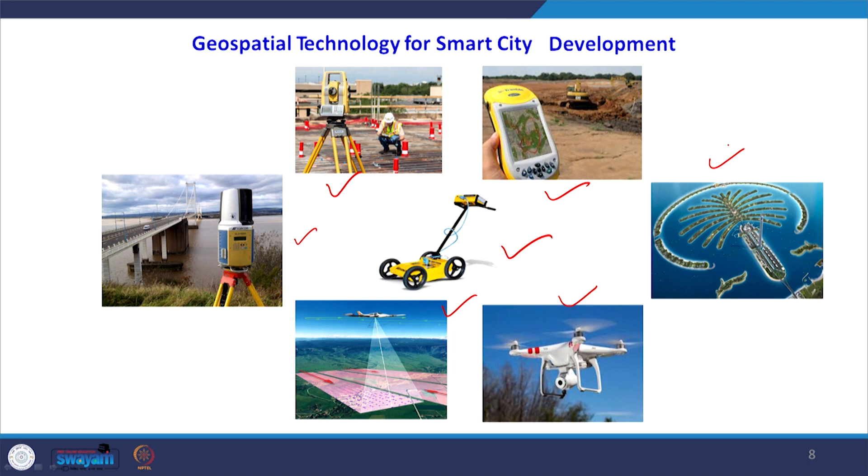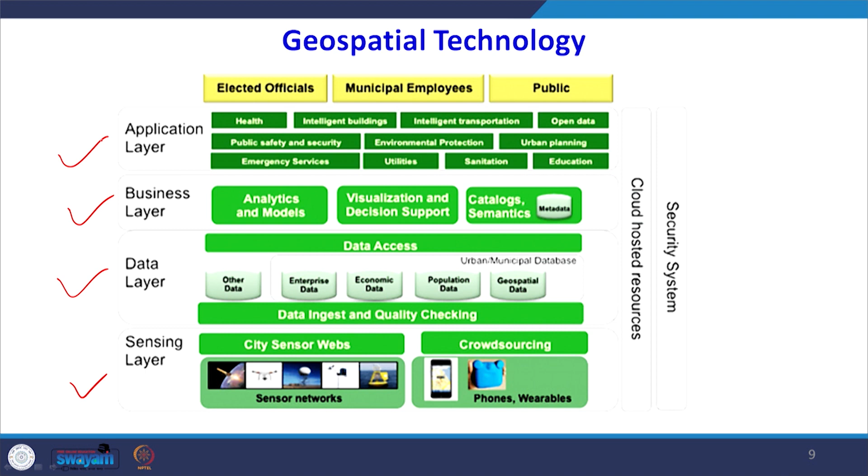Finally there is the application layer. We apply the input derived from this data for health applications, intelligent building applications, utility, sanitation, urban planning, and the education sector. This is the application layer, where the data comes from the first layer.

There are potential uses of geomatics in smart city planning, whether it is urban planning as a whole, land use planning and management, or developing emergency response systems using the capabilities of remote sensing, GIS, and GPS data. Health facilities planning, where we want to develop new health facilities in a particular area, is like a location allocation modeling problem.

Parking area planning is a real problem in all major cities, as there is no parking space, particularly at tourist locations. So parking area planning, where the driver is communicated well in advance whether parking space is available or not, is important. New infrastructure planning is another area, and tourism planning too, because in many areas revenue could be generated from tourism only, like in Uttarakhand where we have Char Dham, where tourism activity is growing very fast, and better tourism planning can be carried out with the help of these geomatics tools.

Then online property tax management. This is billing, collection, online collection of utilities, phone bills, etc., and grievance redressal. This is also a very important part. You can provide feedback, and you can upload your grievances which could be attended to electronically. So this is all the potential applications.

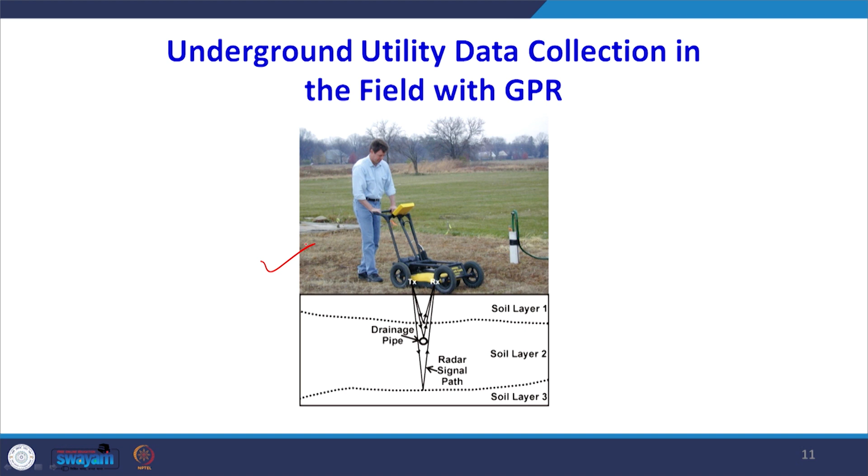Now if we look at some of the tools and devices we are using for collecting data, this is a ground penetrating radar device, and the data is collected below the ground, because all the utilities in the smart city have to be buried under the ground. Whether it's a telephone line, electric line, power line, cable, or gas line, these all have to be buried under the ground, and there should be proper mapping. That you can carry out with the help of this device, called the ground penetrating radar device, so that wear and tear is minimum, and you spend less money on maintenance work.

When the facilities are above ground, you can have broken poles, and due to strong wind, sometimes you have a cut off in electricity because the poles are broken. That kind of problem will not be there when we have underground utilities.

Now if you are talking about intelligent transportation systems in a smart city, the geomatics tools will provide a lot of information to us, giving improved safety, fewer accidents, improved traffic efficiency, and reduced traffic congestion, because this is a big issue in major cities of the country, and as a matter of fact, worldwide. So we can reduce traffic congestion if we have advanced information with us.

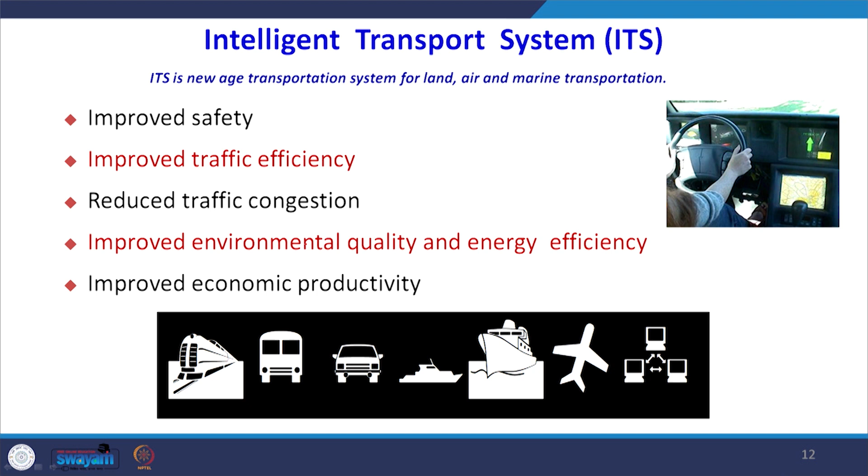We can improve environmental quality and energy efficiency, because a lot of emissions are produced by vehicles moving on the road. And we can have improved economic productivity with the help of the latest devices and by developing intelligent transportation systems.

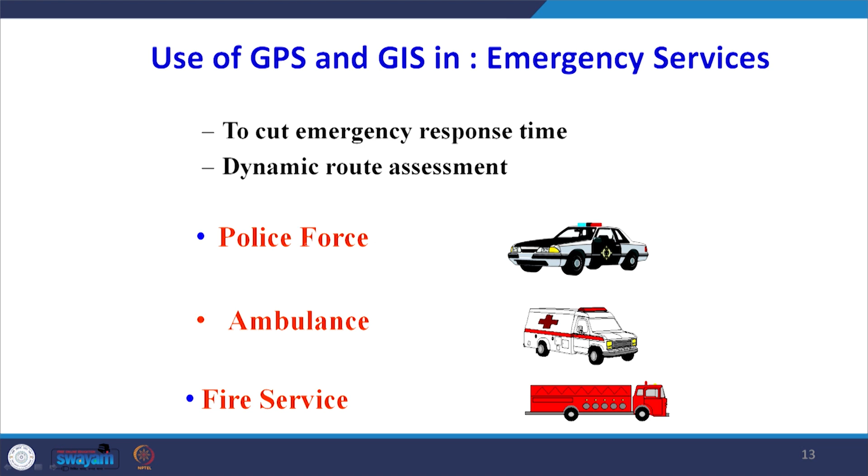These GPS and GIS, and also high resolution images, will be used in emergency services. So emergency services in smart city areas like police, ambulance, and fire services will be equipped with all the modern geomatics tools, so that you can avail emergency services in case required.

So everything in that car will be governed by the sensor systems, and the person who is driving or operating the vehicle will be informed by these sensors. The information will go to the device, and accordingly action could be taken.

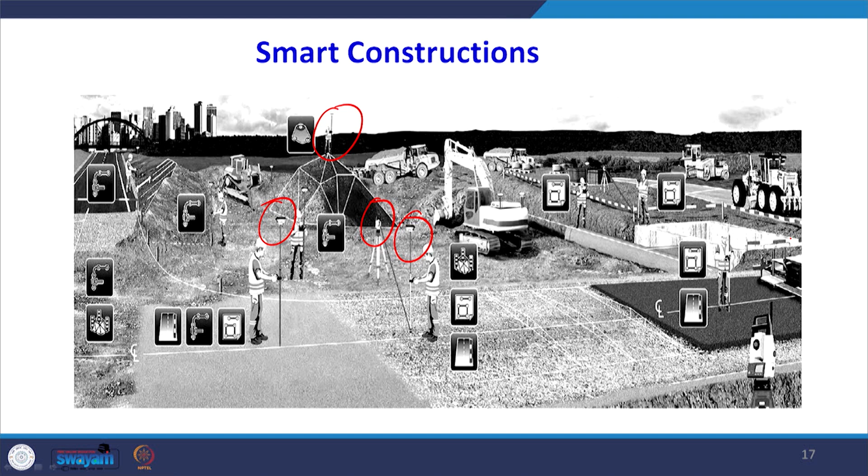Whenever you have a 3D model of the structure, these devices also work on the basis of coordinate systems and point cloud data, so there is one-to-one coordination between the actual drawing and the data collected at the site. That is why this is called smart construction. These geomatics tools help us make construction very precise.

Mobile 3D mapping systems, which you have seen earlier, can collect data for a larger area. When planning a new urban area or setup, data has to be collected very fast in a 3D environment, so you require a system that can be mounted on a vehicle to collect data about that area. Then we also require satellite images.

So one can carry out trend analysis and pattern analysis, and also study what kind of infrastructure would be required to support the growing population in that particular region. Urban growth can be determined using sequential satellite images.

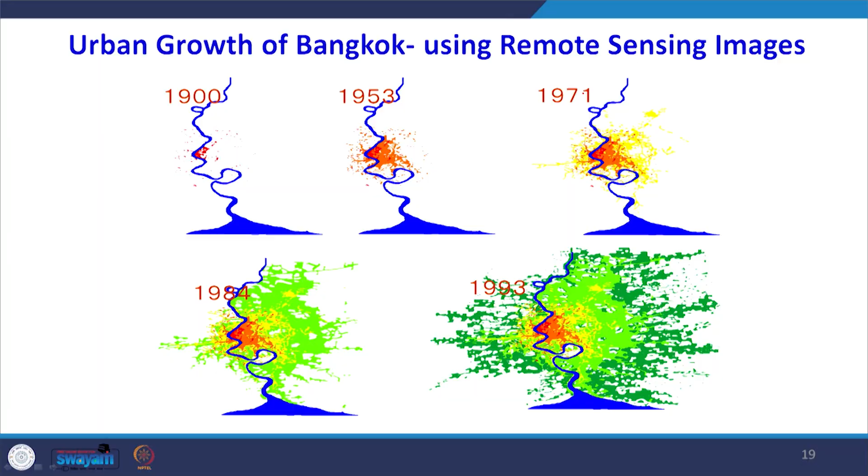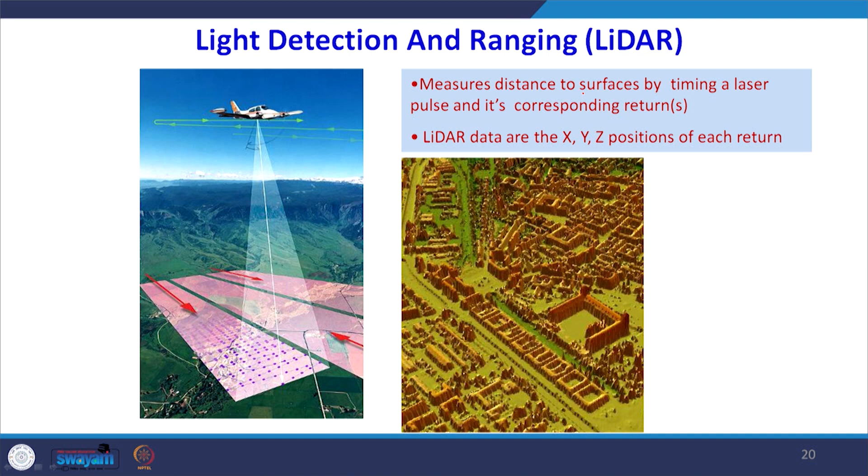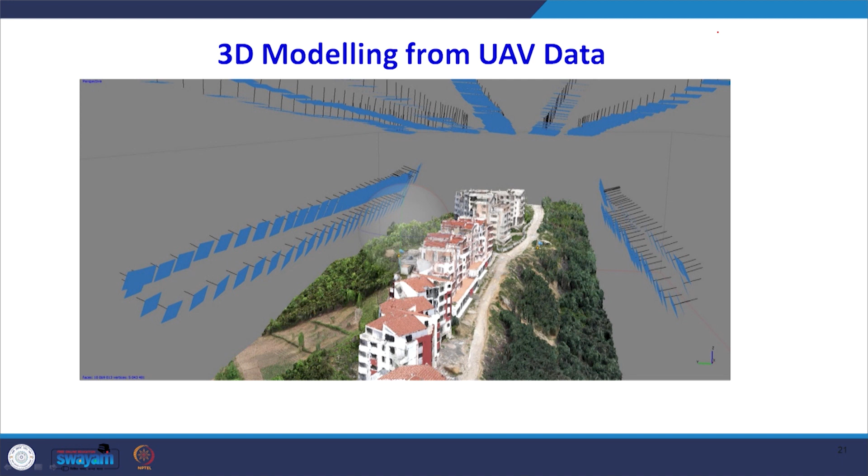We now have very high resolution satellite images where we can find each and every building. If we want the three-dimensional coordinates of a building, such as its height, we cannot get that directly from the satellite image, but we have LiDAR technology available, which gives us the height of individual buildings. UAV is another technology where you collect data from a lower altitude using a drone, creating a 3D model of the entire area or infrastructure. These kinds of images are very helpful for carrying out precise planning in the area.

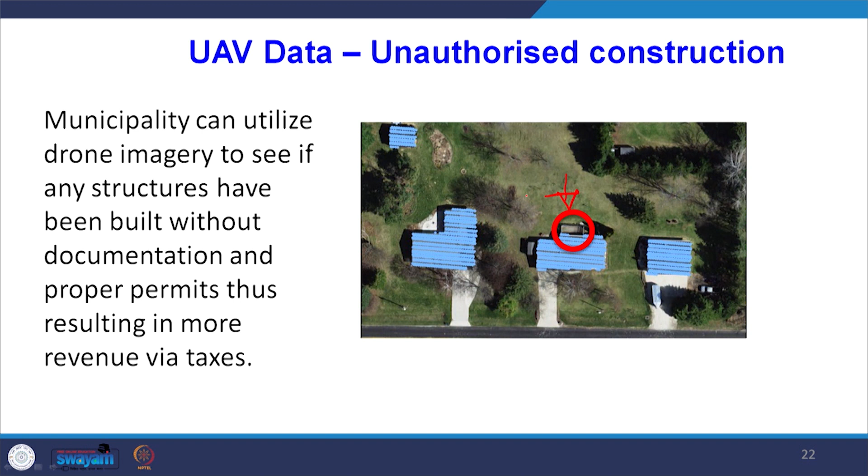Unauthorized construction can also be located if you have sequential images at very high resolution. For example, the circle here shows unauthorized construction. This is a major problem in big cities, where there is construction not approved by the local authority, and we can determine that using this technology.

When we are doing construction, drones can help us a lot. In the modern construction industry, drones are used to monitor construction activity. Here we see one drone, another drone, a third one, and a fourth one, all operating in the area at different heights, used either for building inspection work, for delivering materials to the client and staff, for monitoring on-site activity, or for security applications, which is also a major issue nowadays.

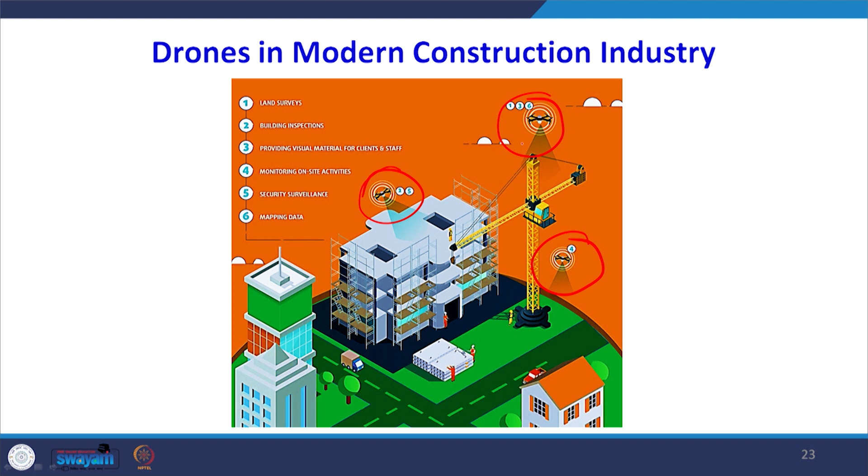These drones are continuously stationed at a particular height, collecting data and providing it to the engineer, who may not be at the site physically but is sitting somewhere else, still watching the construction remotely. This shows how the construction sites of the future are expected to be.

We have a building information model, and the infrastructure is connected. Here one can see several sensors and drones shown in this slide, along with certain devices that are connected to each other.

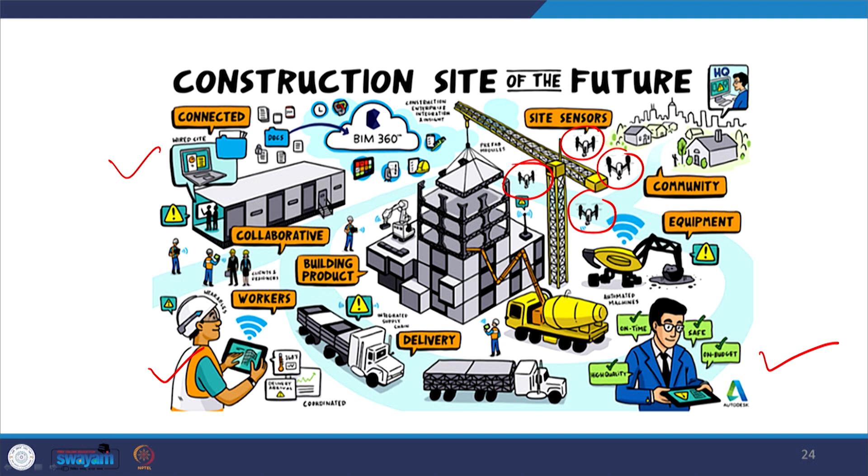There are sensor based equipment, and there are geomatics tools which are providing us the data. Everything is communicated, and whether it is the manager, supervisor or engineers, they are supervising the whole thing through their system. You can see they are all digitally connected, so every information actually comes to their system, and from there itself they can monitor the quality of the construction, or give instructions.

Drones are also useful in several other activities of a smart city, whether we want to inspect our infrastructure, maybe a railway line or a road. Roads develop a lot of potholes, so repair of potholes can be carried out, or if the railway track requires maintenance and repair work, that can be carried out with the help of low flying drones in the area, or for delivery of goods.

This is also very successfully being used in many countries, where drones are delivering goods to people in urban areas. Then there is traffic monitoring, to check whether traffic is moving smoothly or somebody is breaking the traffic rules and regulations. Then environmental monitoring, because there is a lot of environmental pollution in the area, so what is the pollution level? There are environmental sensors fitted on the UAV for that.

There is one new area which is the taxi UAV. These UAVs are expected to fly up in the sky at a certain height, a lower height, and can move much faster than road vehicles, because there is a lot of traffic on the road. Taxis or vehicles cannot move at high speed due to traffic lights and congestion on the road, so these can take you faster from one place to another.

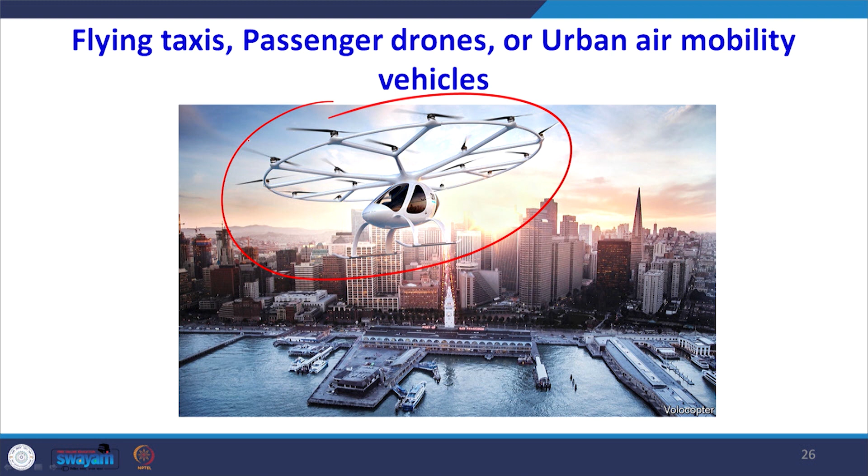So how these flying taxis, or what we call passenger drones or urban air mobility vehicles, work is shown here. This is a flying taxi which will fly at a certain height above the ground and move much faster, taking you from one place to another. If we look at the details, they are just like a helicopter, they will take off and land vertically, so from the rooftop itself you can control the entire thing.

This is a four-seater, for example. It can fly at 600 meter height, and can travel 30 to 160 kilometers at a speed of 100 to 270 kilometers per hour. These are expected to come in the market very soon, and once available, we will have less traffic congestion on the roads because people can use these facilities.

When we talk of the smart city framework for India, there is physical infrastructure planning required, covering energy, water, waste, mobility and real estate. Then there is social infrastructure planning, covering health, education, safety of the people, culture, and citizen services. The third aspect is environmental planning, covering climate change, less pollution, disaster management and city specific environmental planning.

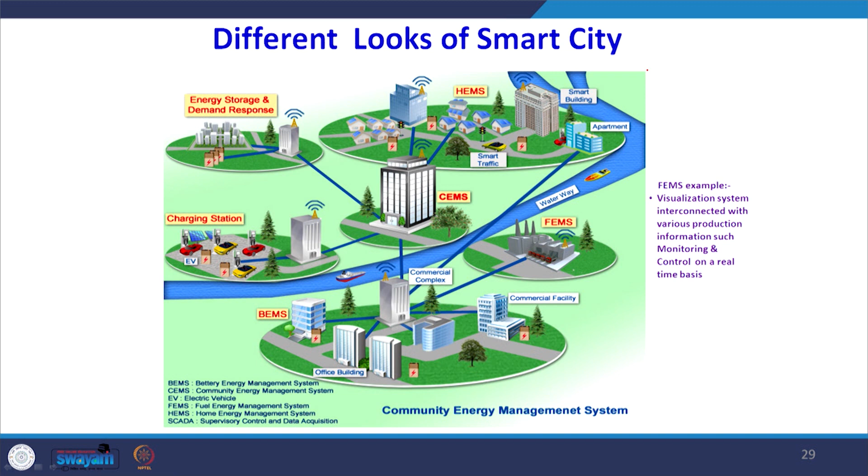The last part is governance, which relates to the development and operation of policies, and communicating with citizens. When we carry out planning using these modern devices and gadgets, we can have a lot of savings of energy. We can manage our energy very well, because it will not just be grid energy that is used, but energy created from solar and other alternate sources, along with energy management systems and fuel management systems at different places.

If we look at some examples in our country, this is Gujarat International Finance Tech City, called GIFT City. This is the entire planning of the GIFT City. You can see the different colors indicating the different features which have been planned, and there are some circular kind of roads connecting the entire facility.

The inner circle and the outer circle connect the entire facilities and locality of the area. This entire planning is done on high resolution satellite imagery using GIS capabilities. So this is the complete master plan. You can also develop the master plan of any smart city area with the help of high resolution satellite images.

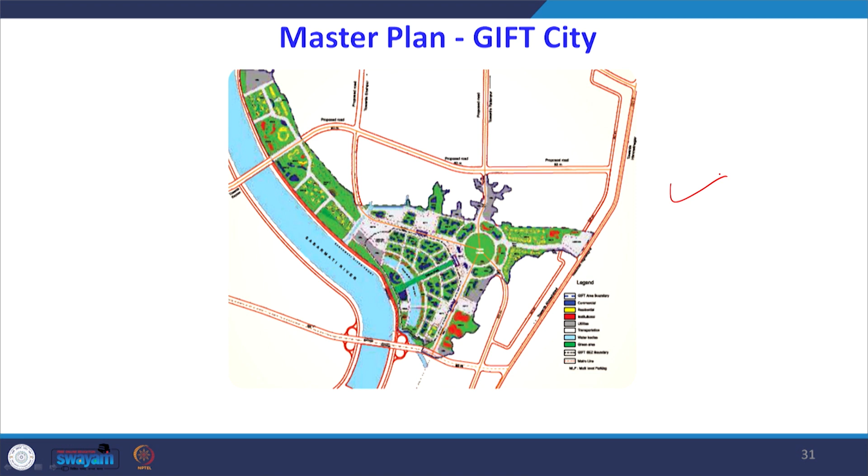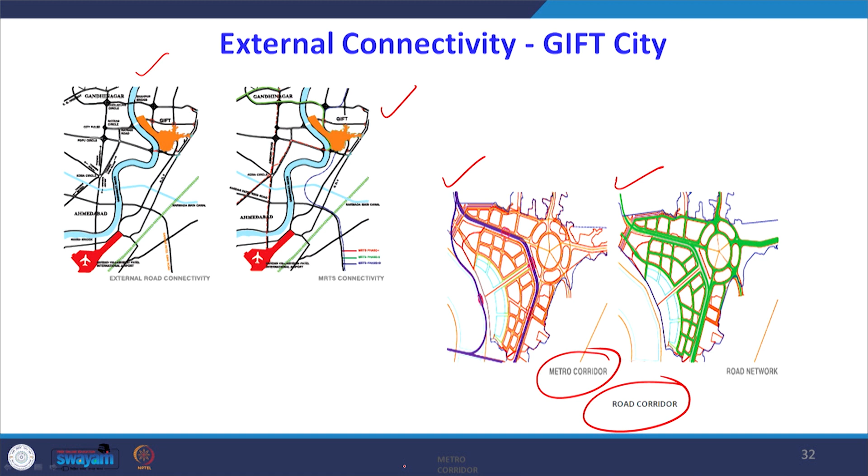Using this master plan, one has to carry out planning of new roads and new infrastructure. GIS plays a very important role here, because when developing a new area, you have to connect it, providing external connectivity since there is hardly any road or space available within the dense area. So you provide, for example, a metro corridor or road corridor to the area, and all of this planning can be done in the GIS environment.

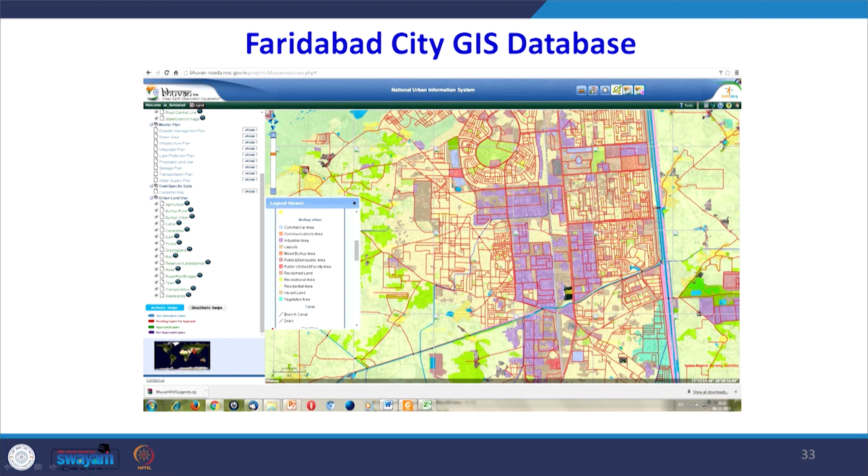This is another example, Faridabad city, which is also a smart city. The entire planning is done, as you can see in this screenshot, with the help of high resolution satellite imagery, and different layers have been created in the GIS environment, each storing specific information about the ground.

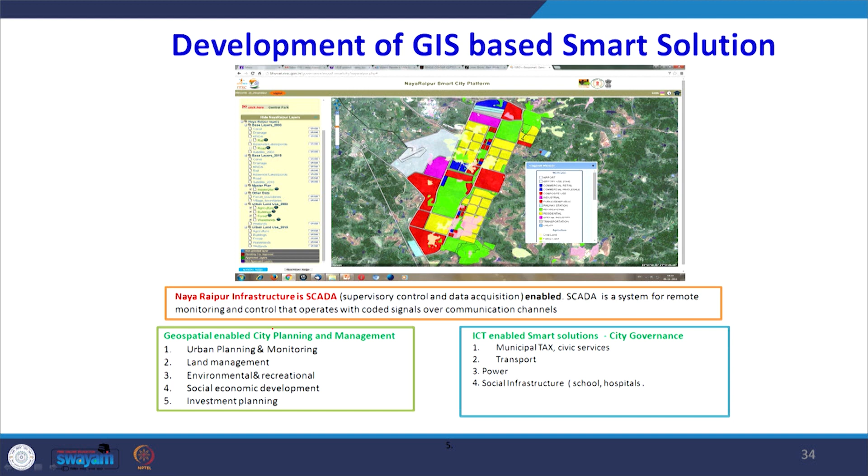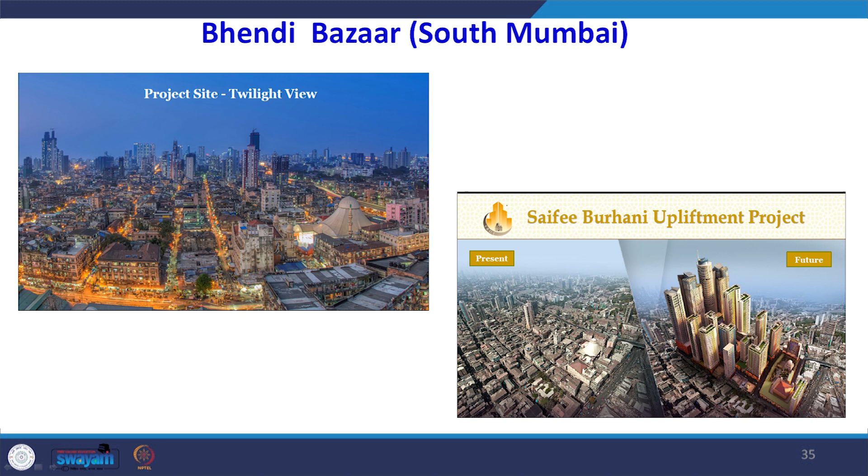Now this is Bhendi Bazaar, showing how this area will look. This is the actual image of the area, this is the present image, and this is the future image. So you can create a 3D model using three-dimensional data and generate a scenario. This is satellite data, and you can see the entire planning has been done on the high resolution satellite image.

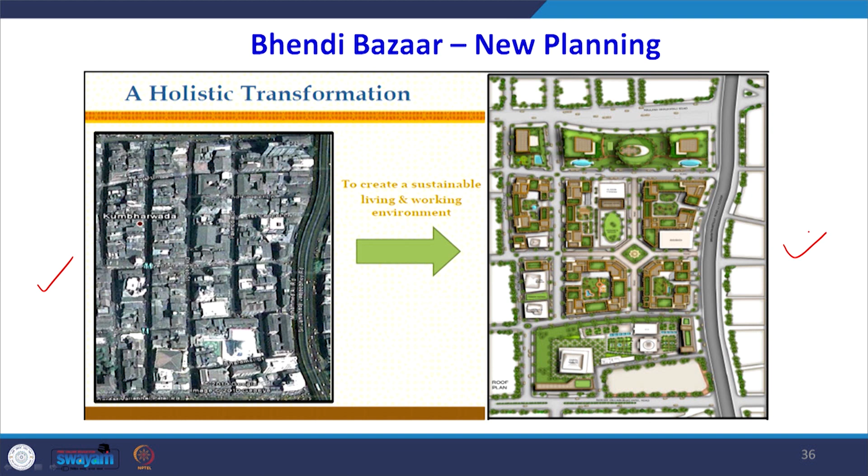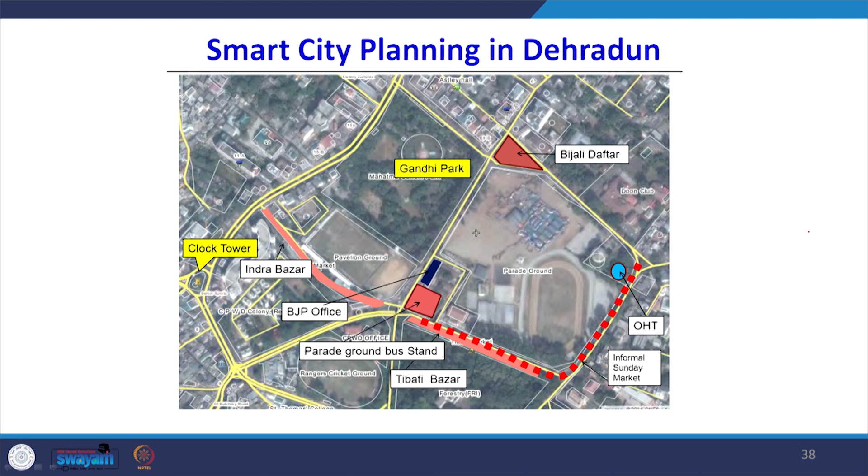Now we talk about Dehradun in Uttarakhand as a smart city planning example. Again, the smart city planning has been done on high resolution images, as you can see in the background, and several localities and infrastructure have been identified, with the entire planning carried out accordingly.

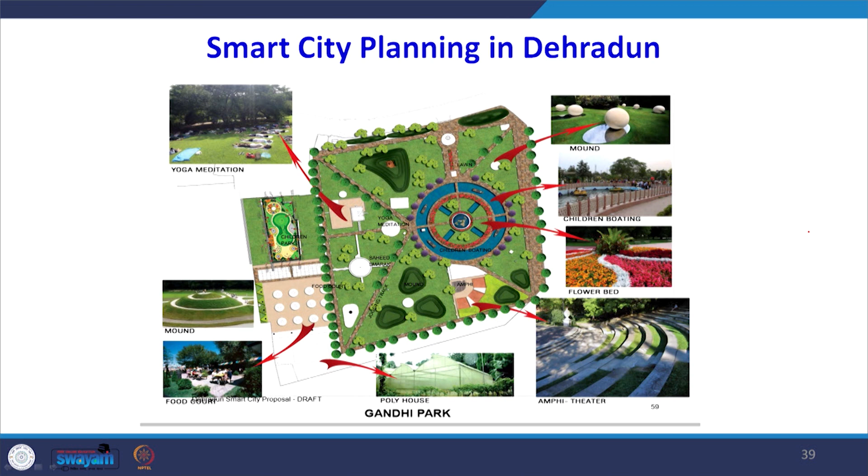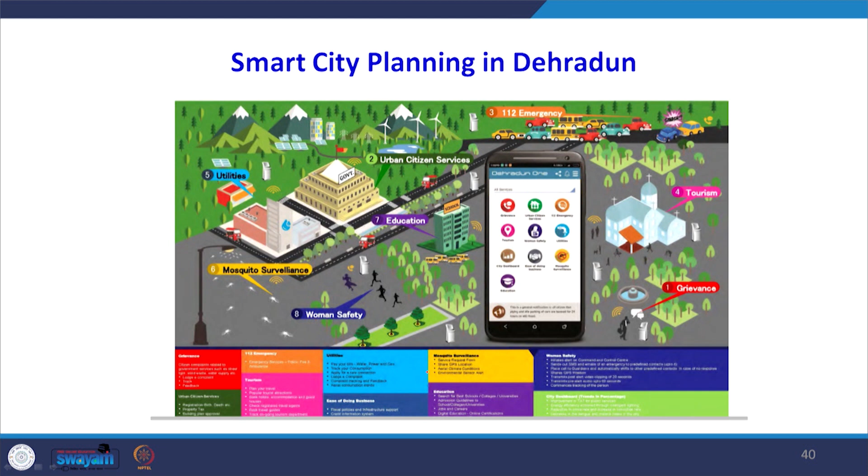Some modifications have been carried out in the GIS environment for the Gandhi Park area and several other areas in Dehradun. So when we have smart city planning for various aspects, whether women safety, education, emergency, surveillance, or tourism, we can connect with individuals using a mobile app. This is the mobile app which can be developed.